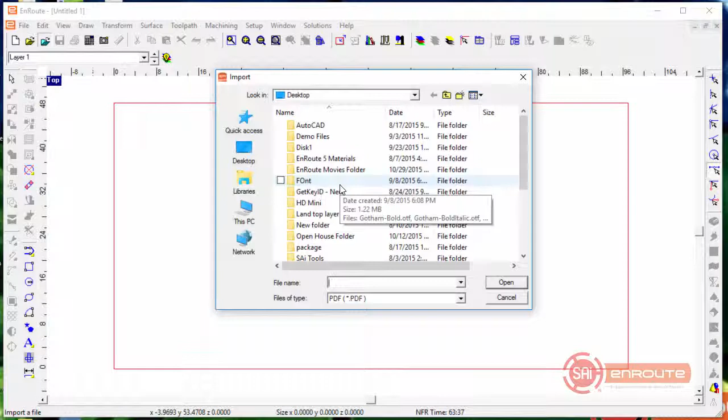Of course, any logos you might use have to follow appropriate copyright laws when it comes to selling products or making money with it. So this is just for demonstration purposes. But what we're going to do is we're going to use vectorizing to turn this from a picture into a contour that we can cut on a machine. So let's come here, and to do that we're going to go to the draw menu. Any design is going to happen here in the draw and transform.

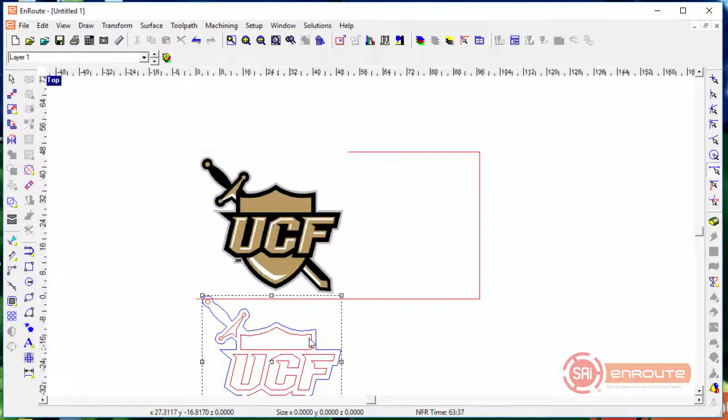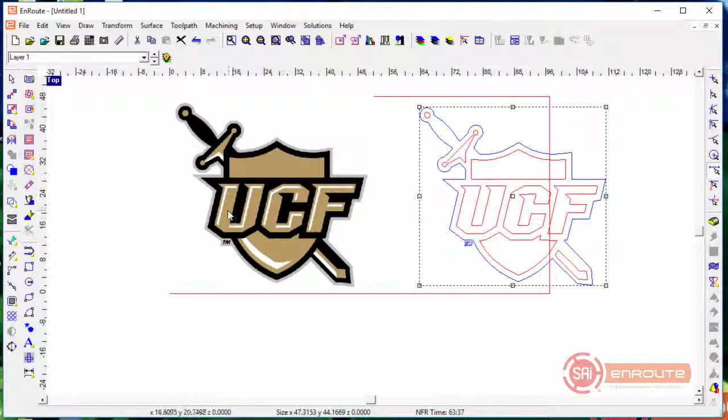We're going to go down to vectorize, and I'll start off using enhanced curves. And if I come in here and I look at this, you see it does a pretty nice job on everything. It does kind of round off a lot of these little corners, but other than that, it does a nice job of giving me a line between where the contrast of colors occurs. I do see that these internal colors didn't separate, but sometimes you can adjust things with shading and contrast to make that happen. It just has to be a certain difference in color or contrast situation.

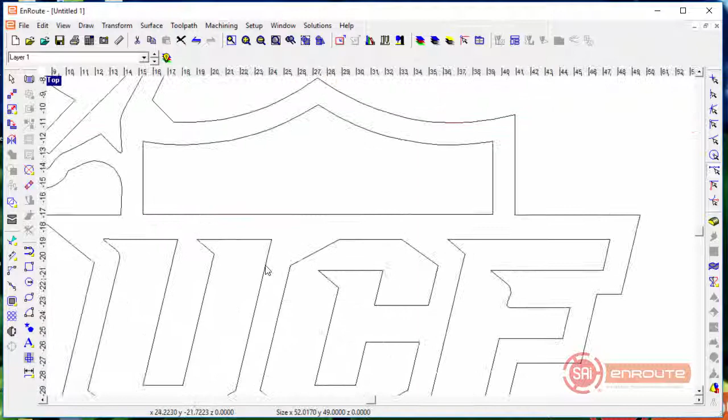Now the other way I can do this is I'm going to come here, and this time I'm going to use my toolbar button, and I'm going to use enhanced corners. And when I have enhanced corners, I can use some sliders here to kind of filter out noise and to give myself sharper edges. If I zoom in on this one, I can see it does a nice job as well, and it gives me some sharper corners here. And I think that in this case, that's more the overall look I'm going for. So I'm going to use this little section right here, and I'll ungroup this and delete this part.

Now I'm going to go and look at my plate size here. I haven't really paid attention to that yet, and it's kind of a big one here. I'm going to switch that to a 24 by 24 inch plate. And we'll say it's going to be 0.75 MDF or some other kind of 0.75 material. And if that turns out not to be the case, let me know later, and we can revise this thickness.

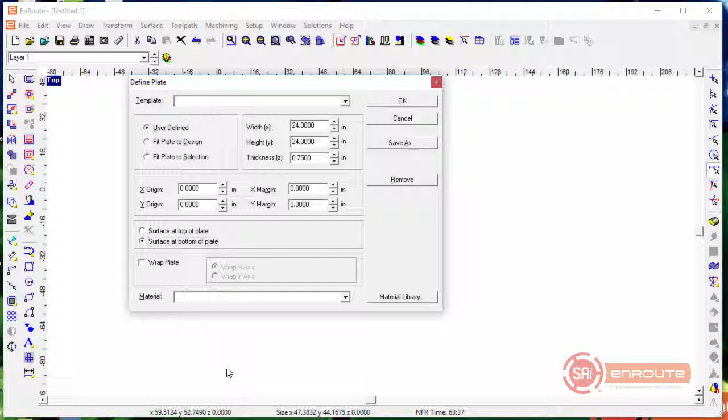But a BSE does a surface at bottom of plate, which means we're going to use the top of the spoil board as the 0, and anything above that will represent above 0, and everything below that will be below 0. So any through cuts will be just slightly below 0, and anything else should be above 0. Oh, that's the orientation there of the plate.

So we're going to hit OK now, and I'm now just going to reduce the size of this a little bit. Looks like I have some snaps on over here that might be restraining my ability to just scale that. And now I've got those off. And if I hit Control and 5 from the number pad on the keyboard, it will center whatever I've hit in the center of the material. So I'm going to hit Control 5 there, and now we've got this UCF logo right in the middle here.

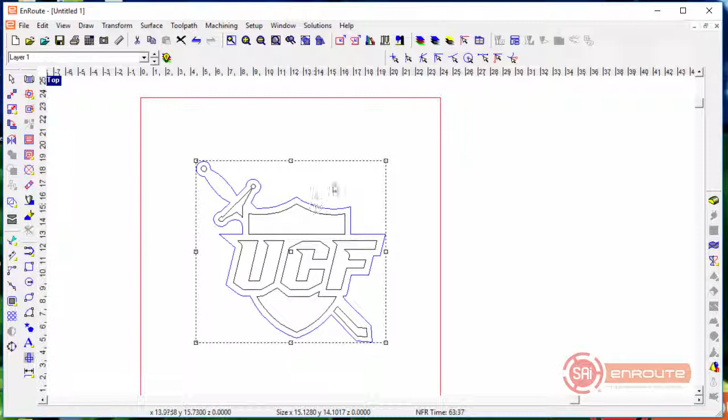Now what I'm going to do is select just the outer part of this, and I'm going to create a texture that's going to go from a border to this text, and this logo will be kind of raised in the center, and the border will be around the outer edge.

So now I'm going to actually create the border, and I'll go to the Draw Rectangle tool, where I could go up here to the Draw menu. Anytime I want to construct something, I'm going to use that Draw menu, and I'm going to choose a, let's say, 22.5 by 22.5 rectangle, and I can precisely place this, or I could allow myself to just use that. Let's see, that was a little bit too much here.

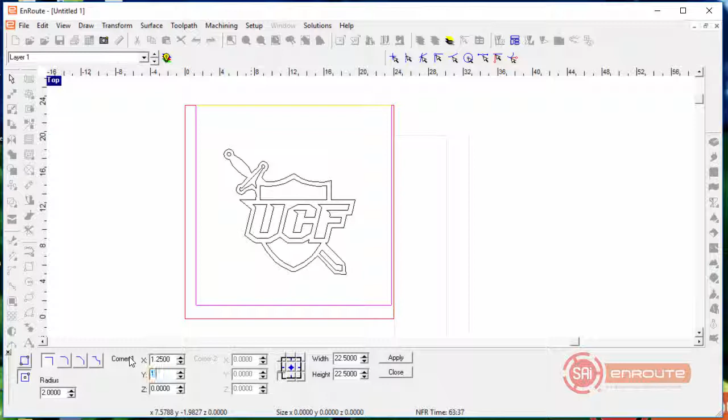I'm not sure what exactly I did there in terms of spacing. I thought it should be 0.75 off, but I just applied it and then have it create a little border there. And if I wanted to, I can make a thicker border there, a thinner border there, or put some type of radius or inverted radius on the corners. I'm just going to go with a straight edge there. Now kind of eye this up relative to the overall size of the part.

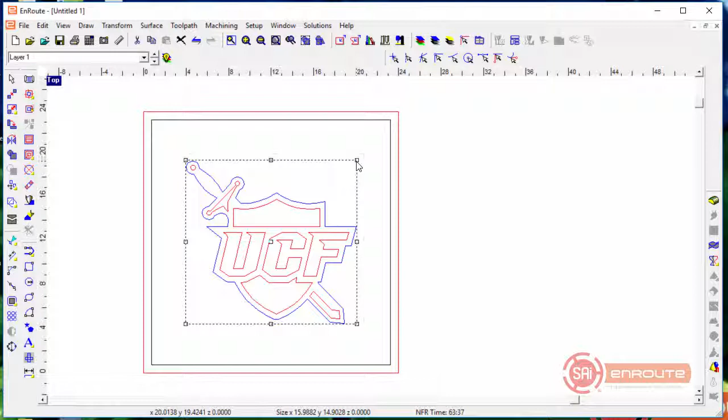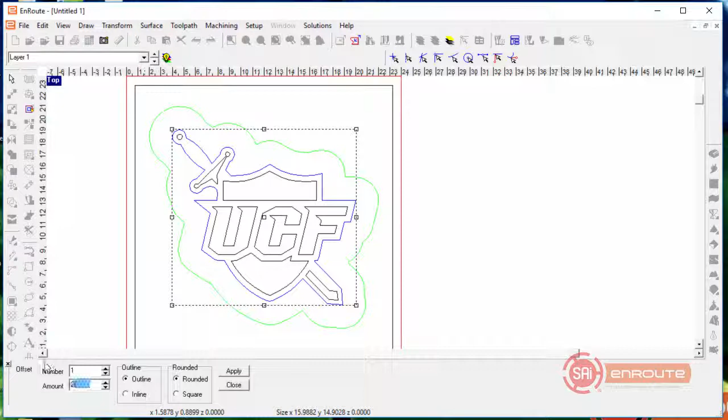And what I'm going to do is, I need to create a texture, and I don't want my texture to cut into my logo. So I'm going to add 1 or 2 outlines here to give a little bit away from the logo and put a border around it, and give me a place I can apply a texture. So let's do this by going to the outline tool, and I'm going to do a 0.375 outline. I'm going to zoom in here and see if I like the thickness of that. Maybe even do a 1/2 inch outline.

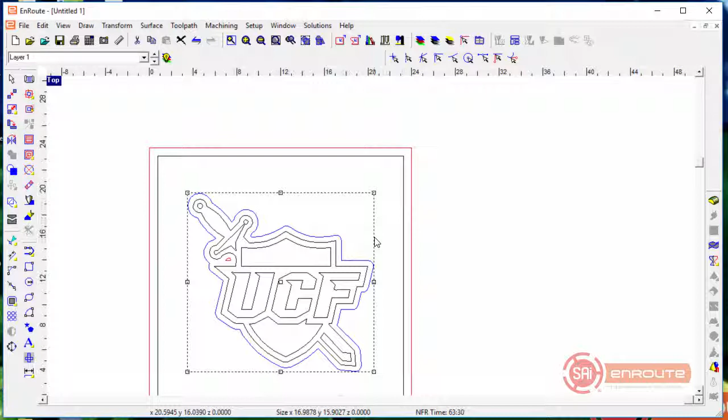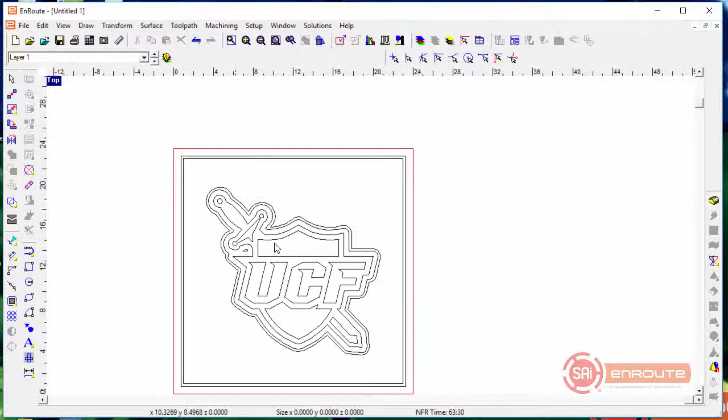And then outside of that, I'm going to first go ahead and apply this. Now I'm going to do an outline that I'm going to use as a border, or a mask to help determine where the texture is going to apply. So one more contour will allow me to create a toolpath mask area. I'm going to select this and the outer border and do this at one time and say 0.25 inside rounded. And this new green line is going to be my mask to create a texture. So I've got a few different contours on screen here that I'm going to now cut with.

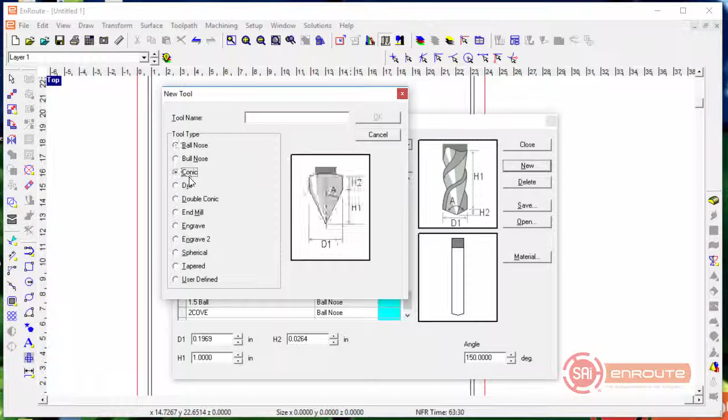Before I do that, I need to go to my tool library, and the two tools I'm going to use are a V-Groove tool. I'm going to sort this by color to allow me to see it. A V-Groove tool, and instead of a standard conic tool, which is a true point on the taper, I'm going to use a taper tool that has a slight diameter on the bottom, so I can use it to clear out material. So we're going to call this tool 90V. I have 90VT here, so I'm just going to rename that 90V.

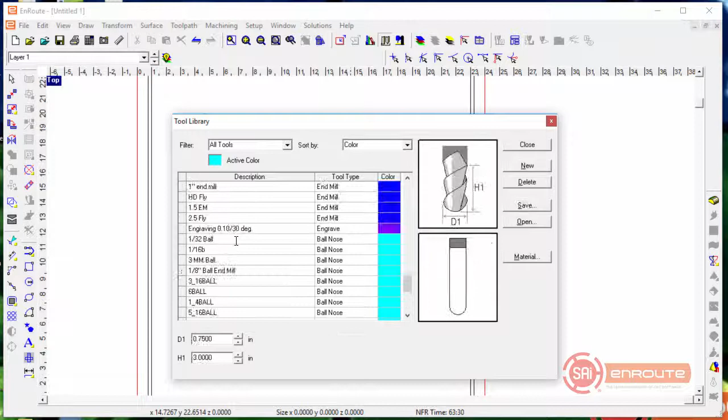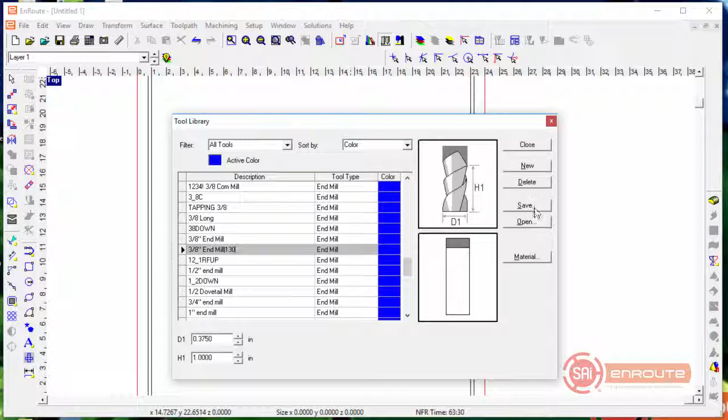And hit save. Now we're going to look for the 3/8 tool, and for now we'll use 3/8 down. All right, so now we just have 3/8 down. Now we're going to hit save here and close. So we'll see how we can do with these two particular tools.

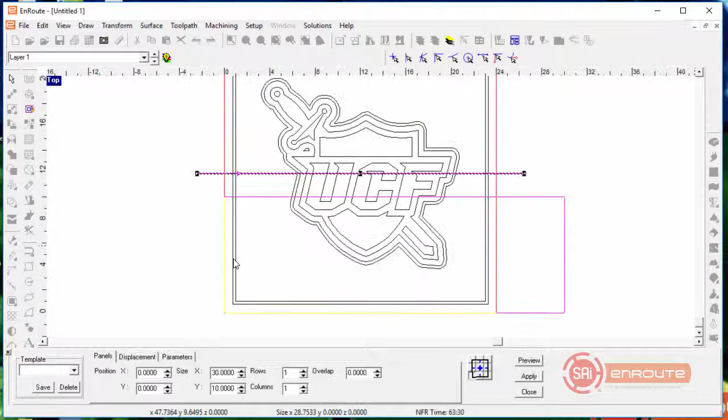Now for Rapid Texture, which is part of the Pro version, I'm going to create a seed contour here, and go to the Rapid Texture capability. I don't really need to worry about panel size here. I'm going to make sure overlap is 0 because I'm going to click on the inline outline I created, and that tells me where my toolpath is going to mask. It's going to mask inside that area. Now I have a 90-degree V-Groove tool. I'm going to use a few settings I've used a few times to create a nice effect. We'll go with 0.4 here, 0.4 here, and 0.25 for my Z depth.

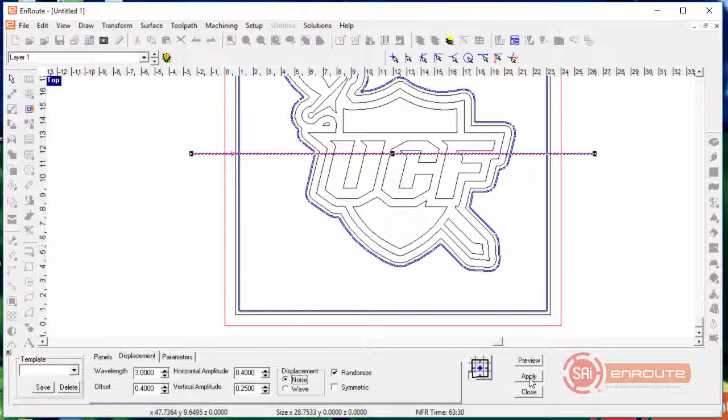And I have randomize checked and noise checked, which means each line will move in its own random manner. When I hit apply, I can see that the toolpath was created and it goes back and forth. It's moving in the X, Y, and Z axis between these inner and outer borders. Now I'm going to come to the side view.

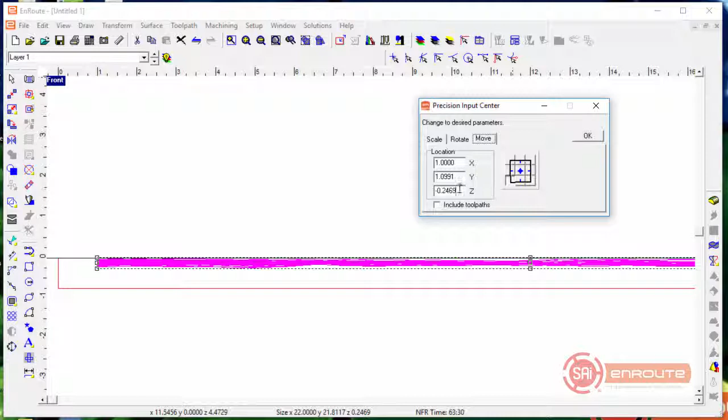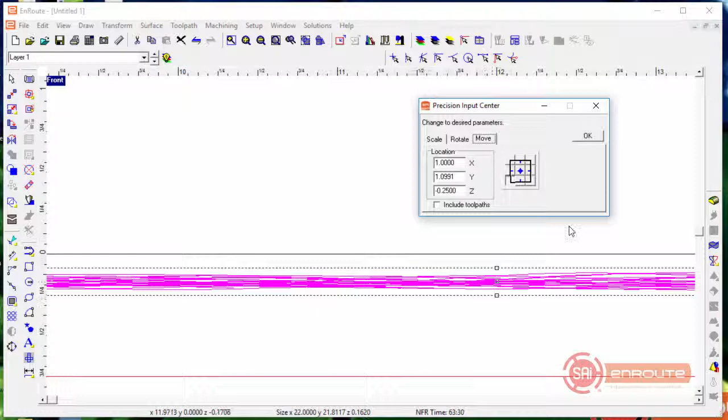I'm going to hit F2 to bring up the Precision Input Center, and hit the Move tool here. First, I'm going to make this go a little bit down from the top, and I can do that just by selecting that handle and dragging. And I'm going to say minus 0.25 for my final depth. This way the outer border will be raised a little bit from the texture. That's why I moved that top part down just a little bit. Now we have minus 0.25 as my minus Z axis position. All right, so now we have our texture where we want it. Now I'm going to select my inner contours.

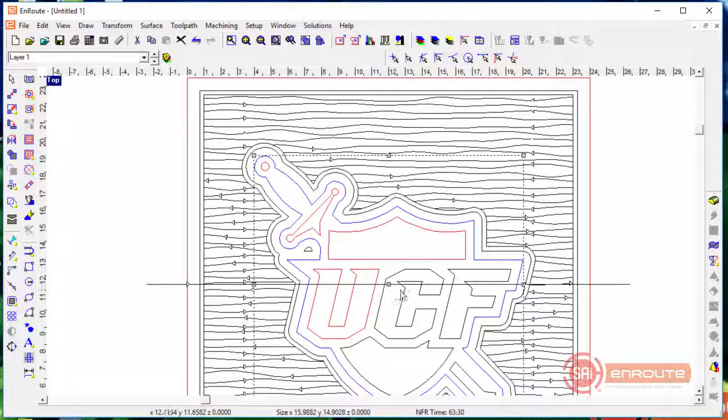And we're going to apply a toolpath here, and this is going to be an island fill toolpath. We use our 3/8 down, and if I have a strategy that's already saved, I can reuse it, but in this case I'm going to be doing a little bit of a new one here, so we're just going to go ahead and create this from scratch, and then I can save it and reuse it again later if I want. So I'm going to use a 3/8 down for my end mill, and then go to my taper tools and use 90V as my taper tool.

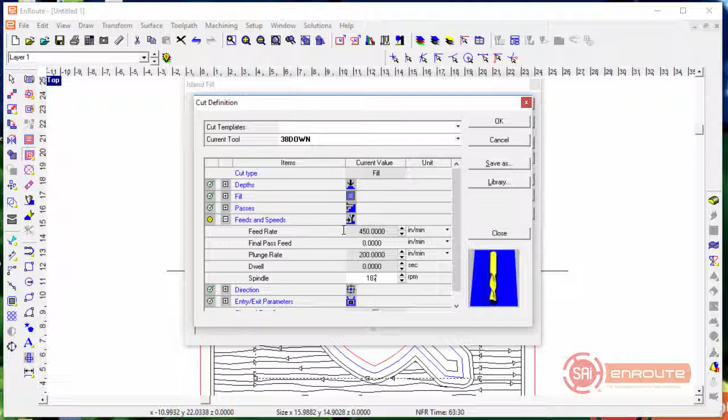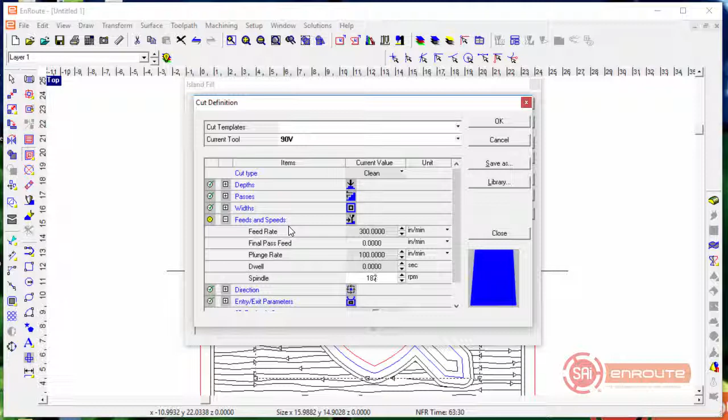All right, we're going to try a depth of 0.25. Let's put some feeds and speeds, and we're going to output this in metric, but we're going to just put some values here. Let's say 450. And if you see these values and they're out of line with something you want to run, just tell me the different ones and I'll re-output the file. Let's just say 300 here. All right, and the last one we'll do the same thing. 18,000 here for the RPMs.

All right, so now if I want to reuse this later, I'd save this as 3/8 down fill with 3D clean, and maybe 90V. So that tells me now what this strategy is, and I can always come back in here and just reuse the strategy without having to type all this stuff in there.

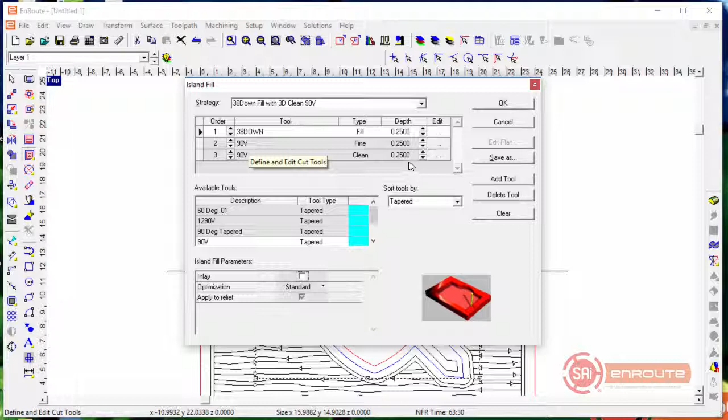One thing I want to do here is I want to make sure this is a 3D clean pass. And when you're cutting this, you want to use a sharp point 90V, not something that's going to leave a diameter like for maybe ACM materials, because you want it to be a sharp point to get good detail. All right, now I need to resave this. All right, now I'm going to hit apply and look and see if I like how this looks.

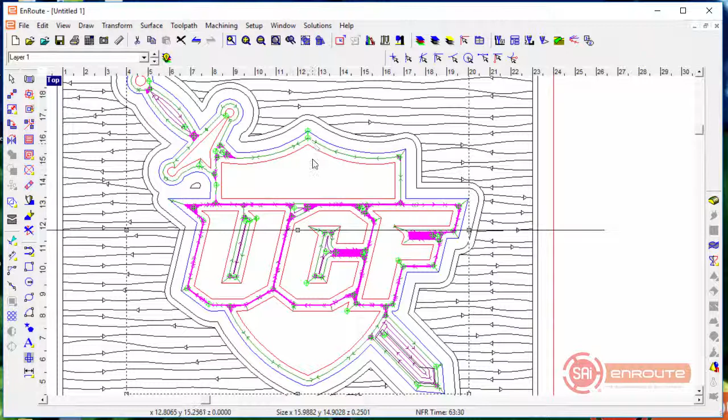Now, because of my depth there, it is actually using a lot of my taper tool to do some cleanup. You know, if I wanted to kind of adjust this a little bit, I could maybe say 0.3 for my depth. It updates all three at the same time, and that way, at least in some areas, you get rid of a little bit of that. But if we had a 1/4" tool, that might go a little bit better.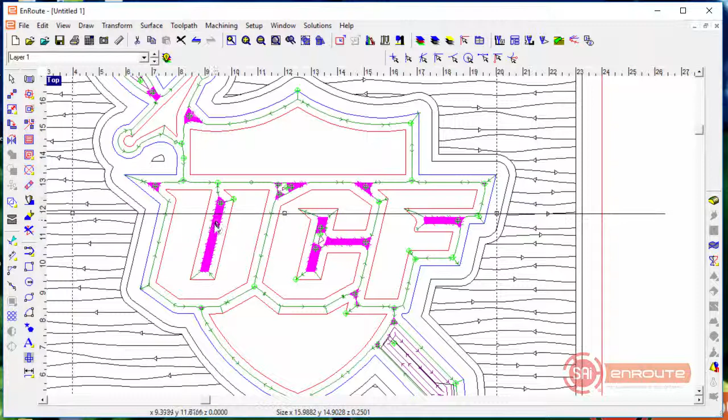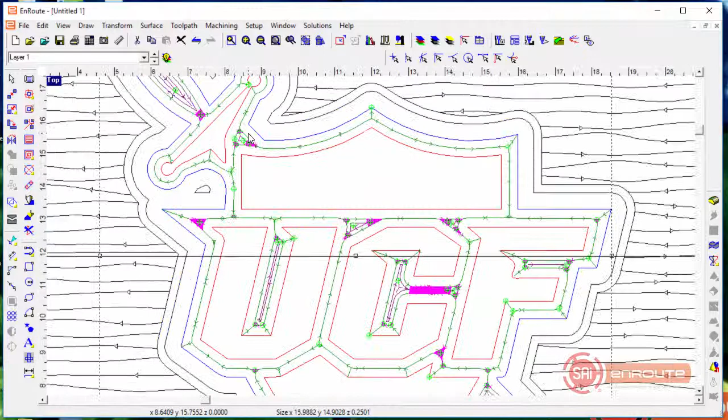So if I come here and say I'm going to use the 1/4 down, and I'll get rid of that hyphen there before I send it to you. But now we're able to use the toolpath to clean it, to take care of a lot more of that. So if I hit F9, it'll show me what's going to cut and what's going to be left raised. And so I'm just going to, for this example, and it won't take too long to cut these areas. I mean, it'll take a few moments, but it shouldn't take that long.

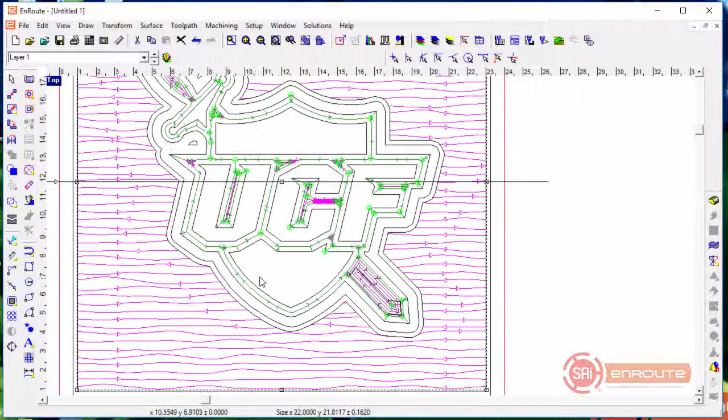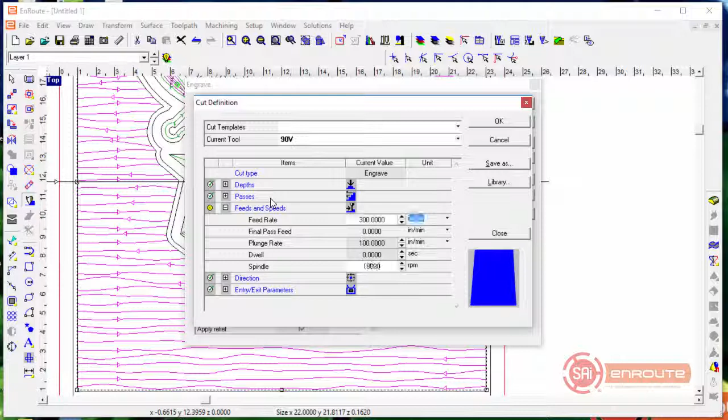And then I'm going to now select all these contours, which go back and forth, and they were already grouped together. I'm going to go to my engrave toolpath. Again, since I'm using specific tools here, I'm not going to use an existing strategy. So I'm going to say 0.25 depth here, but I'm really going to hit follow contour, and that's going to turn my geometry into a toolpath. All right, so there's my feed right here and my toolpath. I'm going to hit apply, and I'll go ahead and regroup that. I just do that so I could select it again easier later on if I wanted to.

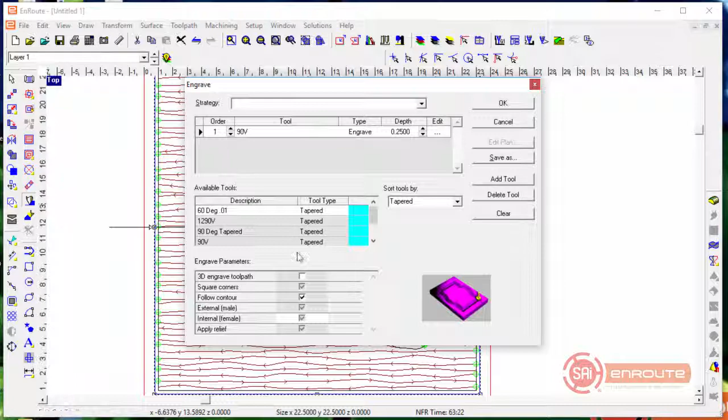And now I'm going to select this contour and this contour of the border. I'm going to apply the same engrave toolpath, but I'm going to make it a 3D engrave internal. So that's going to clean up around the outer edge of this part and clean up the edge between where the texture ends and the graphic begins.

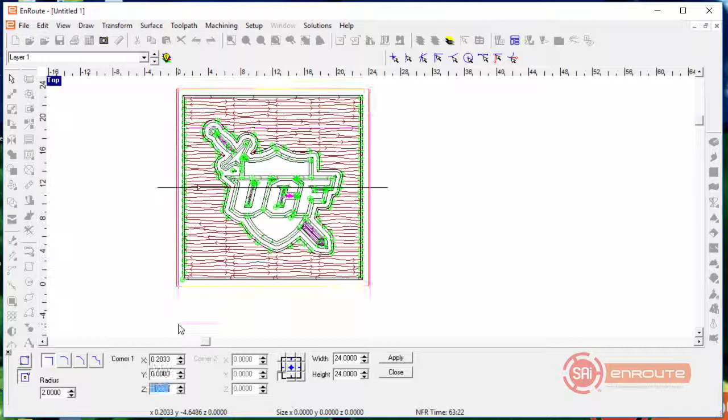All right, now of course if I don't have a piece of material that's a 24 by 24 and I'm cutting this out of a bigger material, then I need to come here and create that geometry as well. Put that at 0, 0. And we would want to come here and use whatever tool we're going to use to do this fill, which is currently the 1/4" down. We might use, or actually let's just go ahead and use a 3/8 router offset to do the cutout.

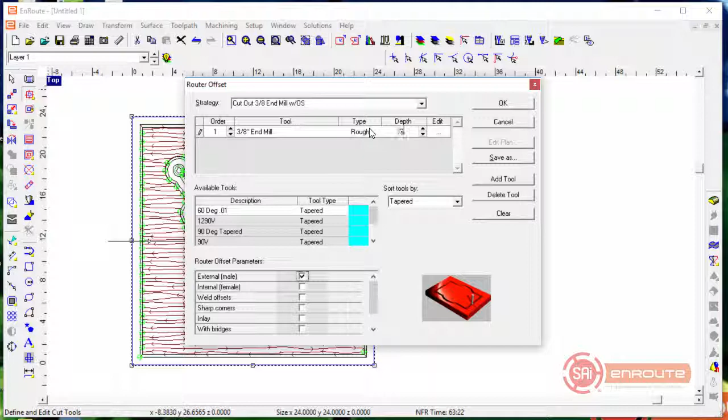So I'll come here and choose an existing strategy. 0.76 will be our final depth. Let's come here and change some of this information in this particular strategy to reflect our current job. So I'm going to change this tool to the 3/8 down.

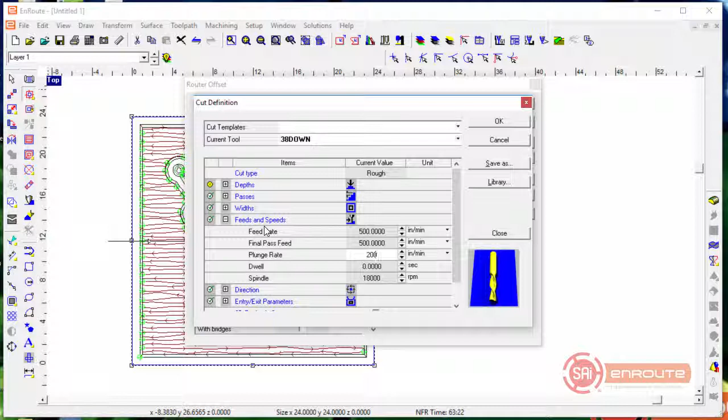All right, we have an entry exit parameter in here, and we're also using a final pass. So we're just going to cut through the material by 0.01, and that leaves 0.03 as well for that final pass. All right, so there's my entry exit plunge. If I come here to the side view, I can see it's going to go almost all the way through in the first pass, and it should just go slightly through the material.

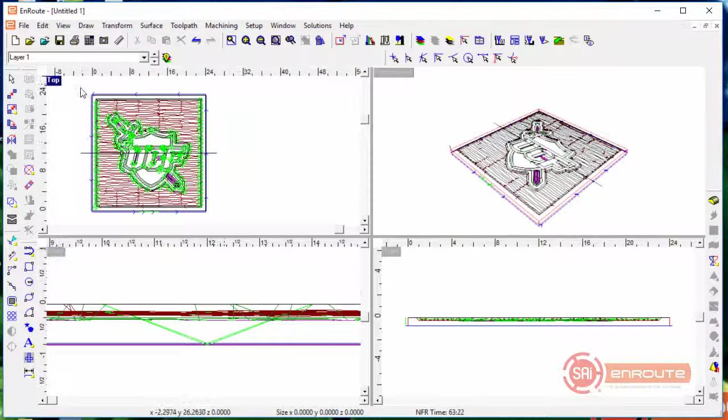All right, now I'm going to select all this and hit Control 1. That's going to put it just inside the plate. And what I tend to do sometimes is to fit the plate. Actually, I wanted to fit plate to selection here. All right, so this contour is right at 0, 0. This way, wherever you define your home position, you're just going to cut this real close to your home position. So I think that's one way to do it.

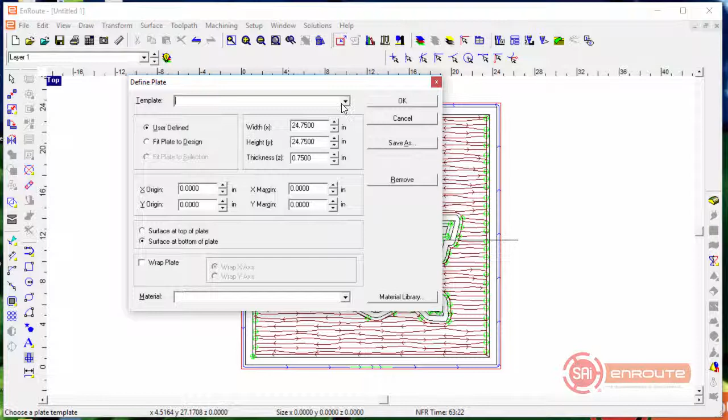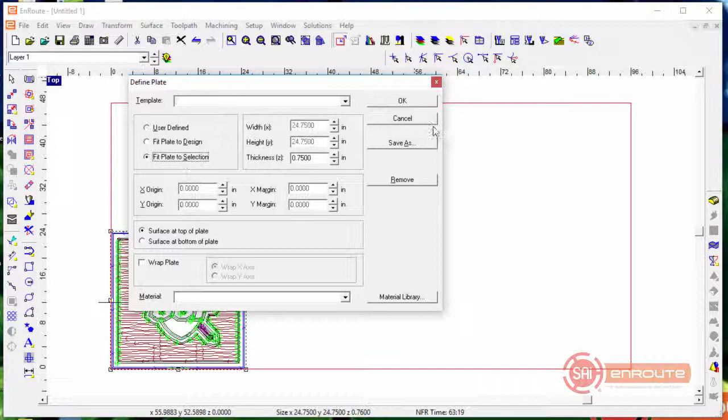Of course, you could still have a 4x8 sheet on there if you wanted to. And we're actually going to flip the Y and put it in its upper left-hand corner with the driver. At least that's how it would work with the XNC driver. But again, I'm going to select this contour and say fit plate to selection, and let's do it like that. All right, so this is what our part's going to look like. Let's come here and do a little simulation.

All right, so we're going to order this so that we do our engrave first, then the island fill, and then the cutout. So as long as strategy is the highest priority, we can order this by the type of toolpath. Then as a secondary thing, we can say we want to do the 3/8 or the 90 degree before we do the other two. That looks good as well. So I'm going to update this. Go ahead and check the sort order and make sure that it's got shortest as the sort order. That should make things cut the fastest.

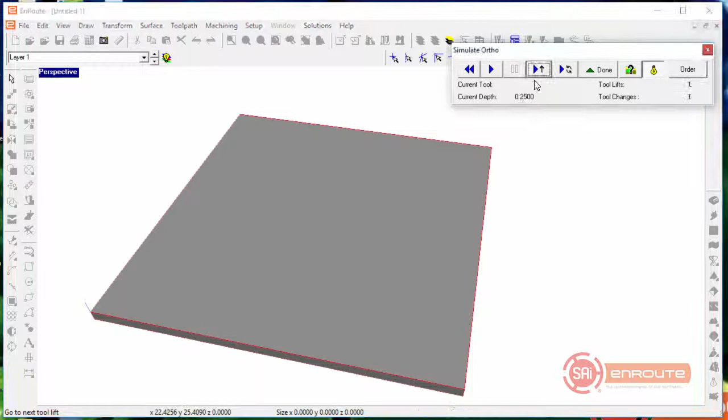And now let's look at our plate. I'm going to hit Control and right click to zoom out a little bit. I want to see this as the lower left-hand corner of the preview here. And let's go to the first tool change, our first tool lift. We can see that the first thing it's doing is the engrave toolpath. If I want to step through it, I can do that, or I can say go to the next tool change.

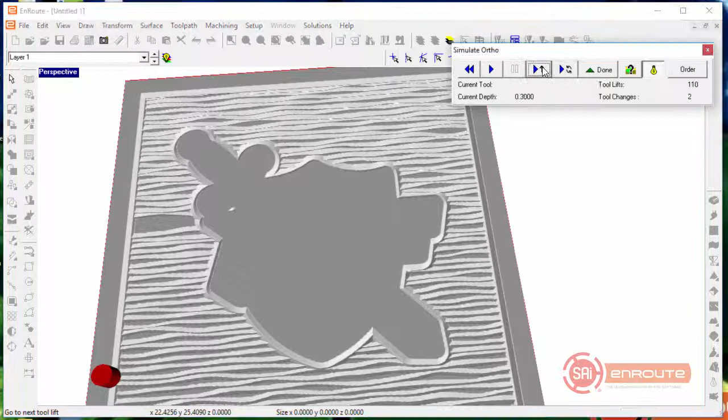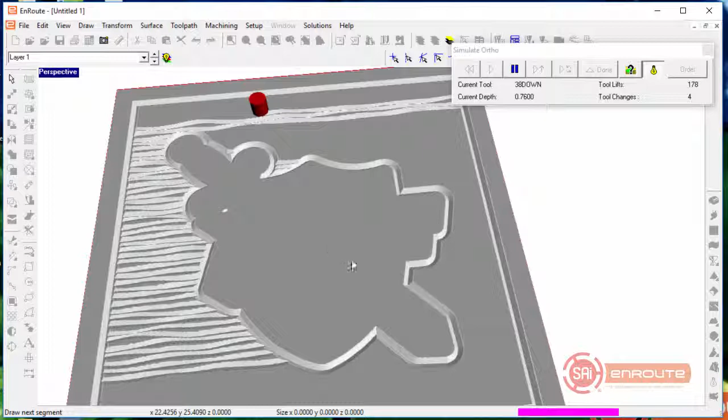All right, now we're gonna play all. Actually, it looks like it skipped something there, so let me hit undo and just let it play the whole thing out here. Well, this is actually just gonna let us make sure that we like the way all the little parts look. And like I said, it's going to take a few moments here to clear some of this out, but because we're using that little detailed tool, the edges on this part are going to look nice and crisp.

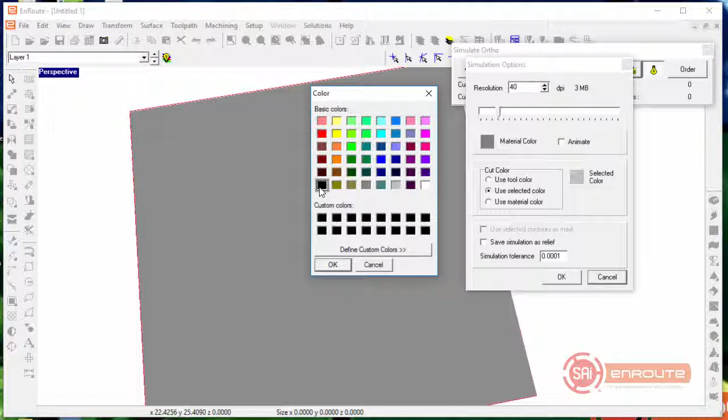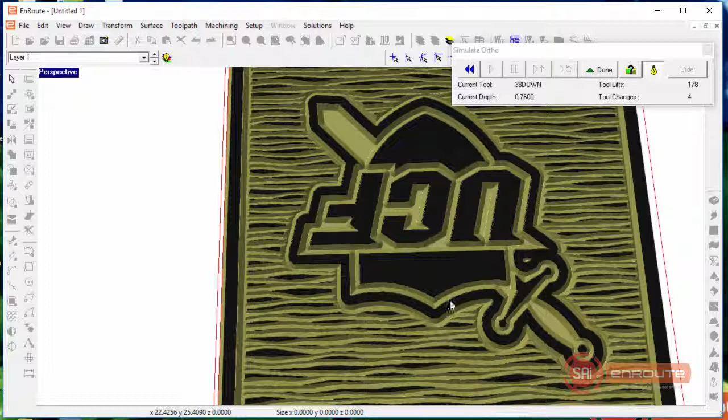What might help it look a little better is if before you cut this part, you were to maybe paint the top of it black, and then let the MDF be the regular MDF color, then you'll get a little bit more of a two-tone effect. UCF's black and gold anyway, and this is just one kind of texture. I mean, we could change this texture here to be just about anything. Looks like I flipped it around a little bit. All right, I'm just using my control and right click to move that around.

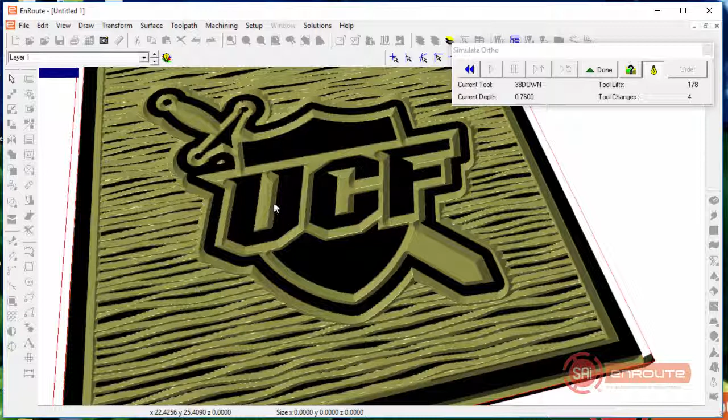So we can change this texture to look a lot of different ways, but this one looks good and shouldn't take too long to cut with that nice spacing between each of the passes. Sometimes textures can take a long time if you make them do too many passes. And we could have added some other contours here and reversed what cuts and what gets left raised, but thought this would look fine. So if you have any questions about that design, make sure to let me know. Now we're going to hit done here.

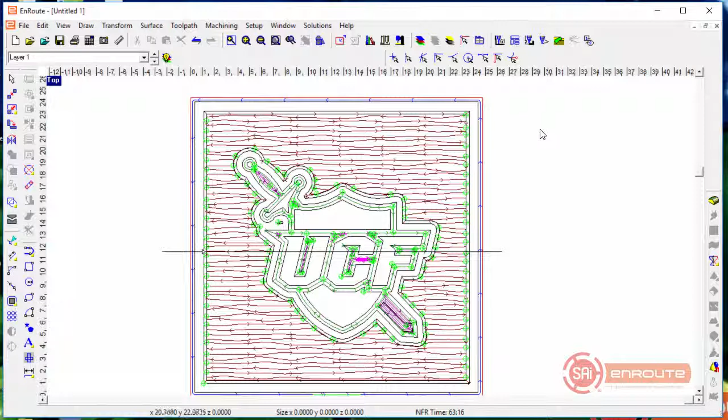All right, and we're going to create the output for these files. So first thing we're going to do is go to the setup menu, and we have the RoverSkill here. We're going to go to the tool changer, and it doesn't matter where they are really. You just want to make sure that the tools you're going to use are in here somewhere.

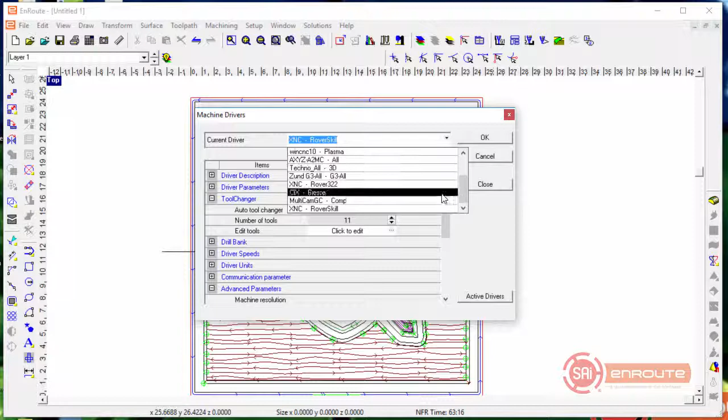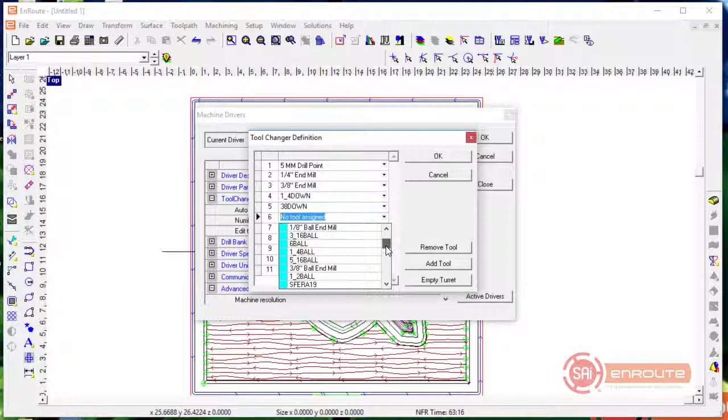All right, so we're going to come here and use, oh, sorry, we're already there, RoverSkill. I just want to add those three tools. So let's go down the list here. We're going to add the 1/4 inch down. Three-eighths down. And all the way down here at the bottom, the 90V. So these are the tool names we're looking for. And as I said, I'll change that one tool name in a moment just to say 1/4 down.

All right, now we're going to go to, or excuse me, not the driver file, but the output file, and make sure that we have the right driver selected, which we do. I'm not going to change the toolpath order or anything. I'm going to do everything. Well, it actually changed a little bit on me, so let's come here. I just did a little testing a second ago, so it moved things around a little bit. So we're going to put that down here.

Strategy is going to be engrave, island fill offset. Tool order is going to be 90 degree, then 1/4 down, then 3/8. Now we're going to make sure that the object order is shortest. All right, all that is done. Now we're going to say to file, and we're going to call this UCF and create the output file.

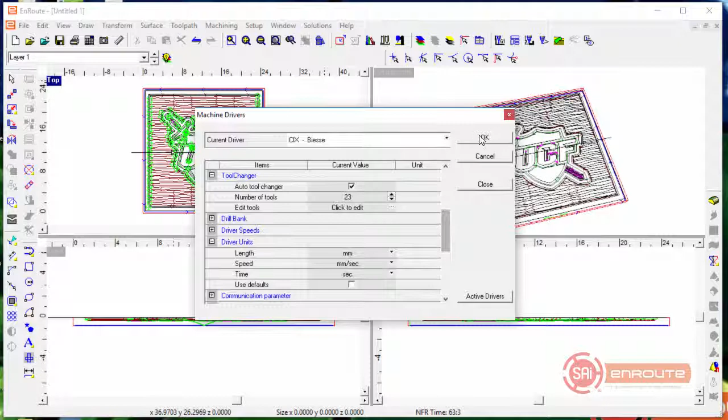Now we're also going to go back here to the driver setup, and we're going to go through this and choose the CIX driver now. And this time I'm not going to worry about adding those to the output. I'm going to make sure that we have the same order here, which we do. When you use a driver and it doesn't have the tools in the tool changer, then it's just going to ask you, do you want to put it? So we're going to say UCF.

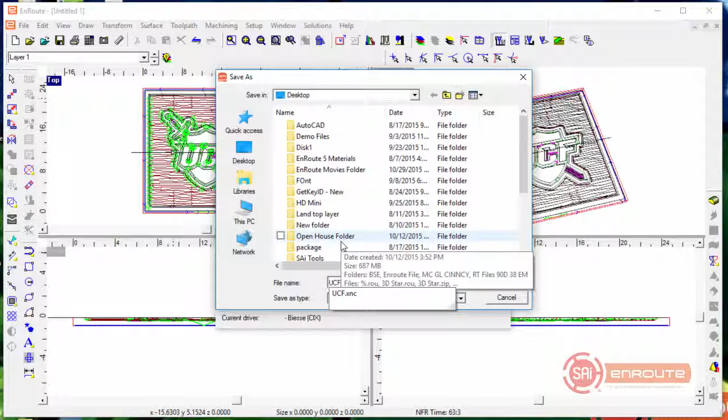All right, and this is going to be the CIX driver, and it's telling me it's not in the turret. So that's okay, because you're just going to use the tool name anyways. So we're going to get rid of the underscore there, and it's just going to look for the correct tool name. So there's our two files.

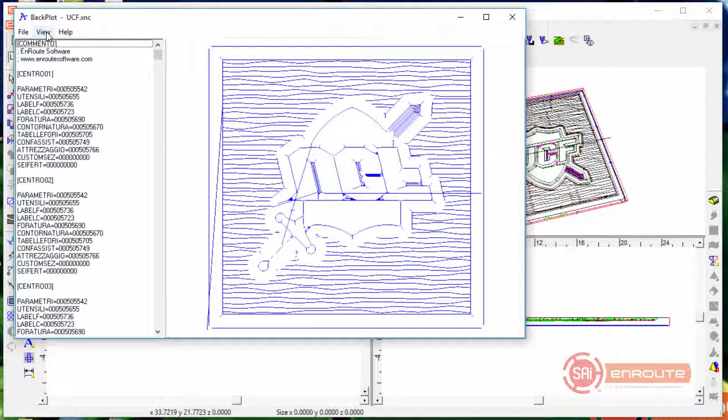Now we can go here to this Backplot program, and we can open UCF.xnc. You can see how much bigger the CIX file is than the XNC file. And this is going to actually show us this output. Now we do some subtraction with the plate and the Y to flip the orientation. But if you wanted to see it properly, you can actually come here and just change your Y orientation. And actually positive is down here. So we want to change those two things to preview this file.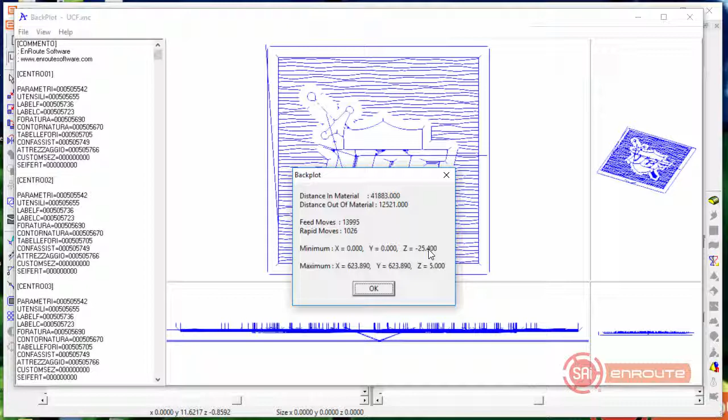And if we looked at the quad view, you can see that here's all the little entry exits and the plunge rates and everything. So it's a good way to check this out. Now we can come here also and go to statistics. It's showing us that the maximum we're going to raise above the plate is 25.4 millimeters, or 1 inch.

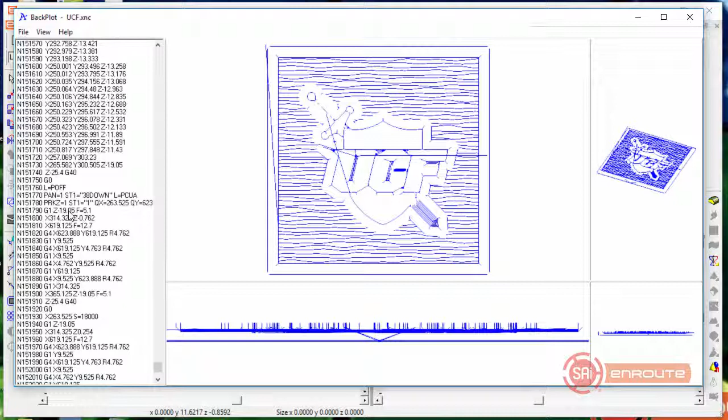And the Z says 5 millimeters into the material, but that's just because of this line of code right here, which says Z05, and I need to find a way to get Backplot not to recognize that. But if we do go down here to the bottom of the code and look up the 3/8 down tool, we'll see that it's plunging. It's going from the safe position above the material down to 19.05, which is the material top. It's 0.75 material. Then it's plunging down to 0.7 above 0.

All right, so that's the first pass doing its thing. Then it's coming around here on the second pass, and make sure I didn't have tool comp turned on in there. Didn't intend to. Okay, no. All right, then in the second pass, it's going to a positive 0.254, so just slightly through the spoil board. And that's what the second pass is going to do. I don't believe we can read the CIX file. So these are the two file formats and an example of how we went about making this sign.